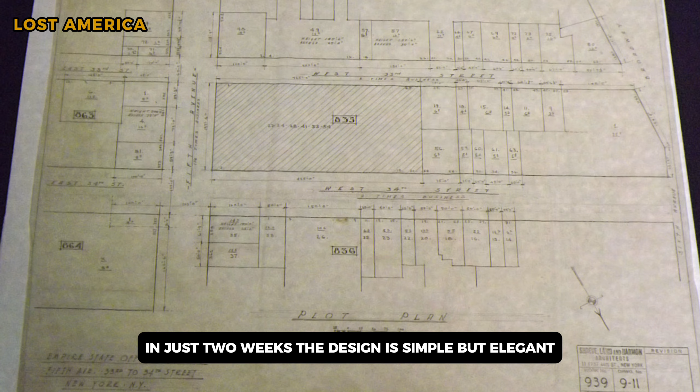The architects work fast. They produce plans for a 102-story building in just two weeks. The design is simple but elegant, Art Deco style, with setbacks at various heights to comply with New York's zoning laws, a central tower rising to 1,450 feet, capped with a distinctive spire.

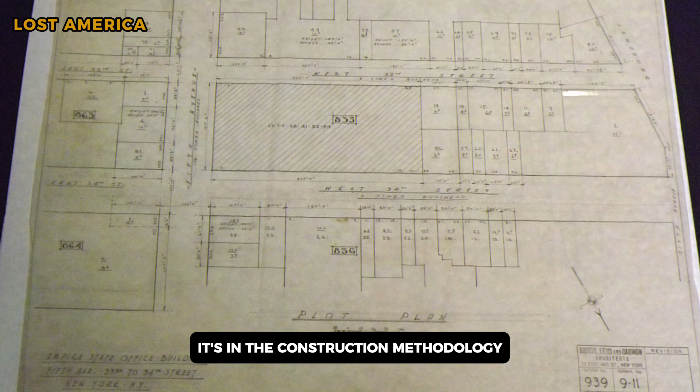But the real innovation isn't in the design, it's in the construction methodology. Shreve, Lamb & Harmon designed the building to be assembled like a machine. Every element is standardized, prefabricated when possible, designed to fit together with minimal adjustment. The building isn't just designed to be tall, it's designed to be built fast.

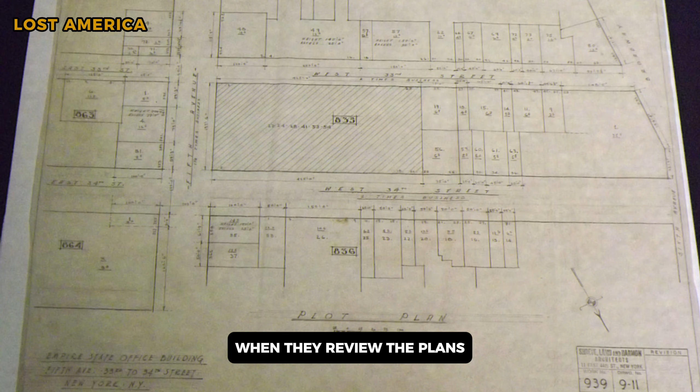The construction company is Starrett Brothers and Eken. They're experienced builders known for completing projects on time and on budget. When they review the plans, they make a promise that seems impossible: they'll complete the building in 18 months, from groundbreaking to opening day, 18 months.

For a 102-story building, this is unprecedented. The Woolworth Building, 57 stories, took 3 years to build. The Chrysler Building, 77 stories, took 2 years. And those buildings were smaller, simpler, built during prosperous times with no pressure to rush. The Empire State Building will be taller, more complex, and built during a depression, in half the time. It seems impossible.

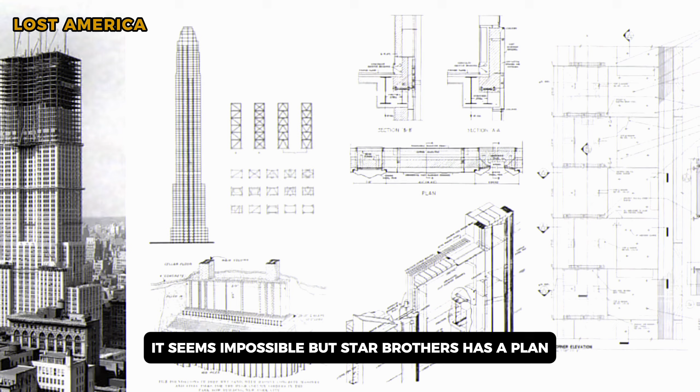But Starrett Brothers has a plan. The key to building the Empire State Building fast is logistics, military-grade logistics. Every element of construction needs to be planned, scheduled, coordinated. There's no room for delays, mistakes, or improvisation.

The builders study factory assembly lines. They look at how Ford builds cars, how factories mass-produce goods. They apply those principles to constructing a skyscraper.

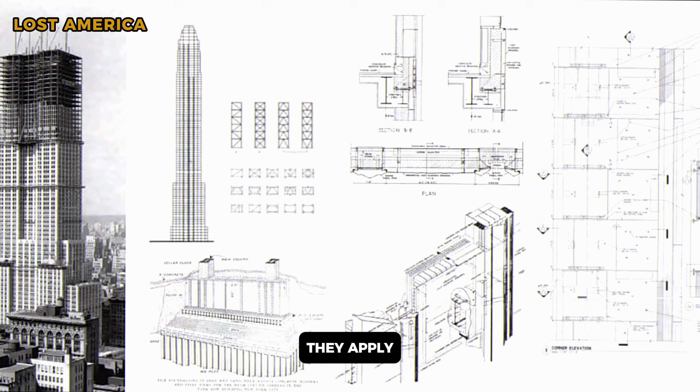The first innovation is the steel frame. The building skeleton will be steel, beams and columns forming a framework that supports everything else. This is standard for skyscrapers, but the way they order, deliver, and assemble the steel is revolutionary.

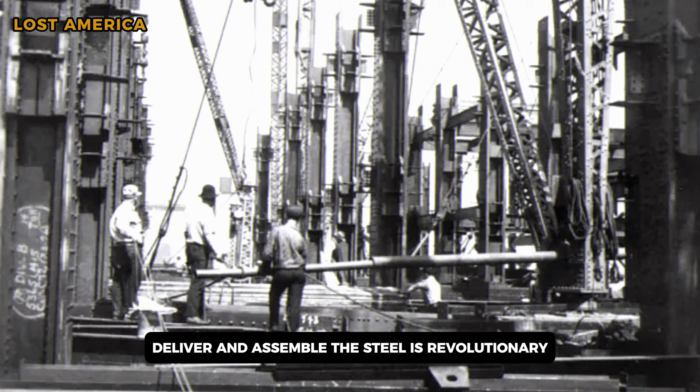The steel is fabricated in Pittsburgh by American Bridge Company. Each piece is cut to exact specifications, numbered, and shipped by rail to New York. The pieces arrive on a precise schedule, exactly when they're needed, not too early, since there's no space to store thousands of tons of steel on a Manhattan site, and not too late, since delays cost money and time. The steel arrives, is unloaded, and is lifted into place the same day, sometimes within hours.

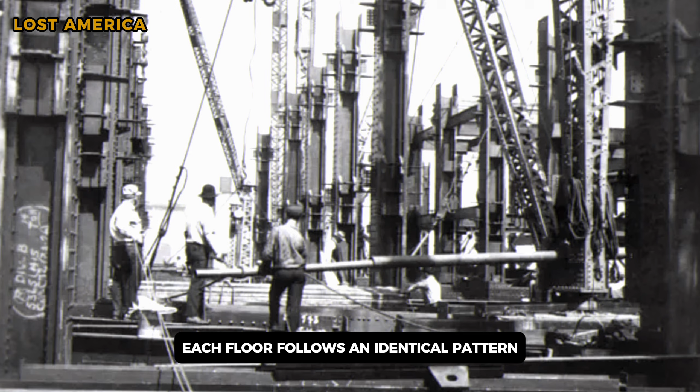The construction site becomes a perfectly choreographed ballet of trucks, cranes, and workers. Each floor follows an identical pattern: steel frame goes up first, then concrete floors are poured, then brick exterior walls are built, then interior work begins with plumbing, electrical, and plastering. By the time workers are finishing the interior of one floor, the steel frame for floors ten stories higher is already going up. It's called the fast-track method. Different trades work on different floors simultaneously, and the building rises while it's still being finished below. This is common now, but in 1930 it's revolutionary.

The second innovation is materials delivery. The construction site is in the middle of Manhattan, and there's no room for stockpiling materials. Everything has to arrive exactly when it's needed and be lifted into place immediately. A dedicated railroad siding is built adjacent to the site. Trains arrive multiple times per day with steel, bricks, concrete, lumber, glass, everything needed for construction. The materials are unloaded and transported to construction elevators, which carry them to the exact floor where they're needed.

At the peak of construction, the site uses 14 different hoisting engines and elevators. Some carry workers, some carry materials, some are dedicated to specific materials, one for steel, one for bricks, one for concrete. It's a vertical assembly line.

The third innovation is workforce organization. With 3,400 workers at peak employment, they're divided into specialized crews: riveters, ironworkers, bricklayers, concrete pourers, electricians, plumbers. Each crew knows exactly what they're supposed to do and when. The work runs on a strict schedule, with different crews working on different floors, coordinated so they never interfere with each other.